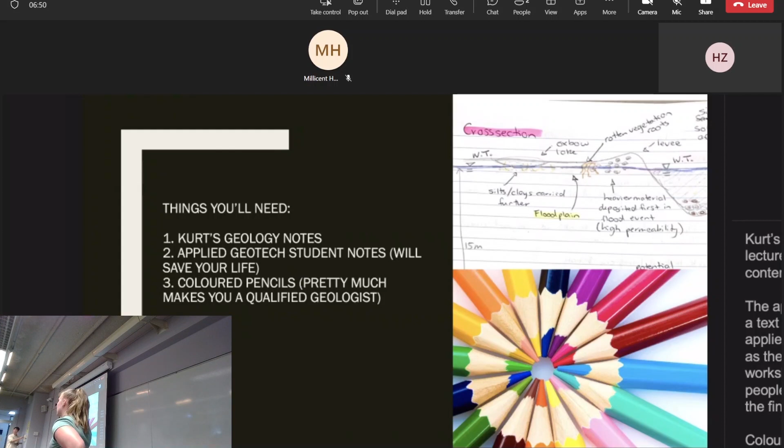So make it easier to see by turning these slides. And then the student notes I was talking about for the second half of the course, it's all in order, it's really easy, it gives you all the equations. They go through it in the workshops. You do the first 3, maybe 4 questions in that book in the workshop, and then the rest you can study. I don't know about you, but I just studied out of that book for the final. I didn't find any other extra things. It was just that.

So for geology, I suggest coloured pencils. Kurt loves coloured pencils. If you ask any geologist, I work in a company which is half engineers, half geologists, they all say half their degree was just colouring in. So try using coloured pencils. I can't say it officially, but I'm pretty sure I got bonus marks just because I used coloured pencils. It was literally brown for the soil and blue for the water, and that's all I used. And he was like, great. So yeah, grab yourself coloured pencils. That's that.

The term outline. Week 1 is plate tectonics, geological time and minerals. Plate tectonics and geological time are good to read through, but it's more just context. It's not actually tested anywhere in the course. It's good to know, it gives you perspective of how things were created, when they were created. It talks a lot about how humanoid life is so recent, and geology goes back to the start of time, pretty much.

Week 2 is the rock cycle and rock formation. It's usually when you do your lab, but I think you can pick your rock lab anytime in week 2 or 3 usually. The rock lab's really easy. You literally just go in and look at a bunch of rocks and they tell you what they are. They ask you questions, but you're not assessed on the questions they ask you. It's just assessed on attendance.

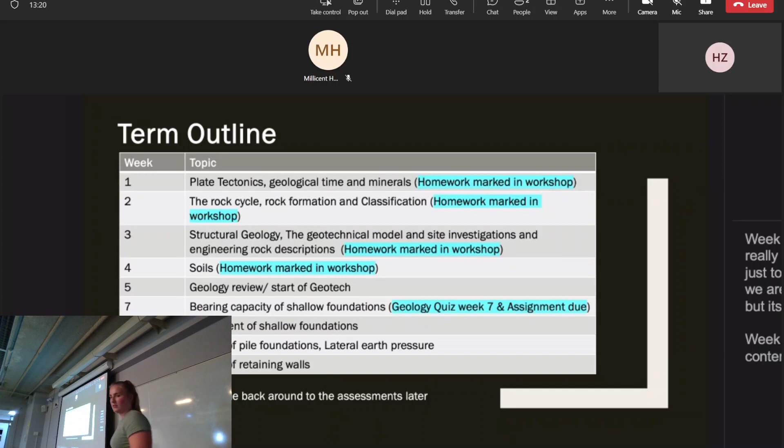Yeah. Well, it used to be actually in one of the classes, but then I think COVID messed that up, and they couldn't fit it back into the timetable for us. So they just said, you have to go with your group whenever you can. But it's really chill. It's really easy. Okay. Are there any other questions before I start content? I'll come back to more about the assessments later.

No? Week 1, geological time, plate tectonics. It's good to read over, but as I said, it's not really assessed again. In terms of geological time, it's broken down into lots of different periods, but they're quite arbitrary depending on where you get your information from, where you are in the world. Different continents divide it differently, and then they go into further divisions again. So for example, Mesozoic, and then that goes into the Jurassic period, the Triassic period, and then one other one that I always forget.

Yeah, that's what I was talking about. You read it once and then you never use it again in the course, so it's not too important.

Plate tectonics, I'm pretty sure we all did this in science in year 10. You have divergent boundaries, which are the ones that are moving apart from one another. If you have two oceanic plates that are moving apart from one another, magma comes in and forms more oceanic plate. So the plates move apart, magma comes up, and there's more plate there. So it's just building plates.

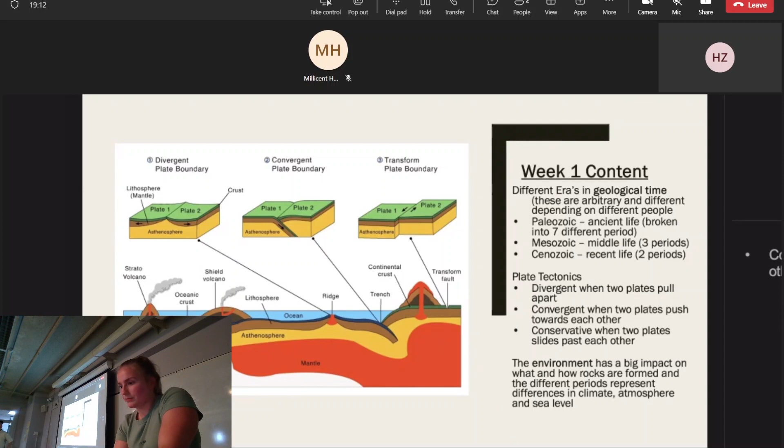And then the last part of week 1 content is giving you an understanding that rocks formed at lots of different points in time, and at those points in time there were lots of differences. For example, different climate, different atmosphere, different water levels, and different pressures. So that has a big impact on the type of rocks and also the features in rocks that you find. Yeah.

Fab. So that's week 1. Are there any questions about week 1? Cool.

Week 2, sorry, I got really lazy with all my photos. I'm not very artistic at all. I'm an engineer in the end.

Week 2, what was week 2? It was minerals, and then it was rock classification and things. It's when you do your rock lab.

Pretty much stratigraphy, I don't know how to say all these words, I always just type them and never say them out loud. It's pretty much just a logic that says the older rock is going to be below the younger rock, because as rock is forming, you have the formation of bedrock, you have more sediment or whatever. Well, I guess this is really in terms of sedimentary rock.

You have more sediment that comes on top. It forms the next layer of rock, you have more sediment. So the top layer of rock is the youngest, and then as you go down, it's the oldest. The only sort of exception to this is domes and basins, which are two different defect types, which I'll go through later. But in general, younger is on top and older is underneath.

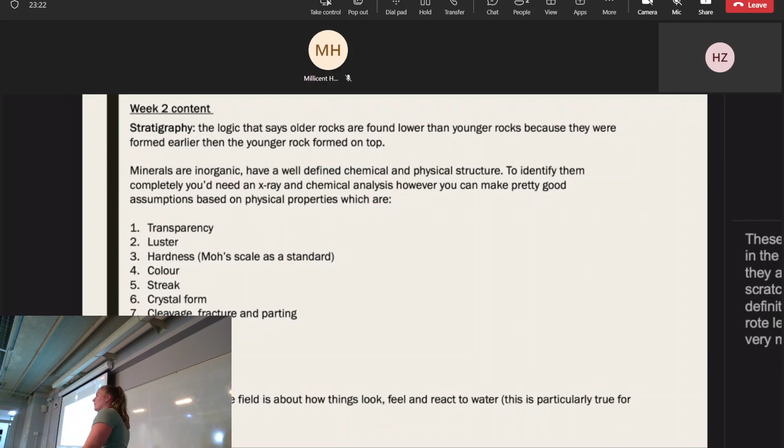I work in this company called PSM. It's a geotech company. We do a lot of field work, tunneling and mining. And pretty much from all the field work I've done, a lot of geology is about how it looks and feels in the field. Feel is really important because you can often feel grain size or things like that. So it's a lot about physical properties. You don't send the rocks that you find in the field back to the lab every time. You just do it by touch on the spot.

Any questions about week 2? No.

Okay. Rock Lab as well is focusing on different types of rocks. There are 3 different types of rocks: igneous, sedimentary, and metamorphic. Igneous rocks are made from the magma, so the mantle layer of the Earth. They change depending on whether they're intrusive or extrusive. Intrusive being they form underground, in confined pressure and heat, they stay underground. A big key factor of intrusive rocks is larger crystals.

The crystals have more time to form because the rocks that are formed underground cool at a much slower rate. As the rock is forming, it's cooling down because it's turning from its liquid state into its solid state. Because it's still underground, it's still close to other magma, so it does it very slowly, and that's why bigger crystals form, for example, in granite.

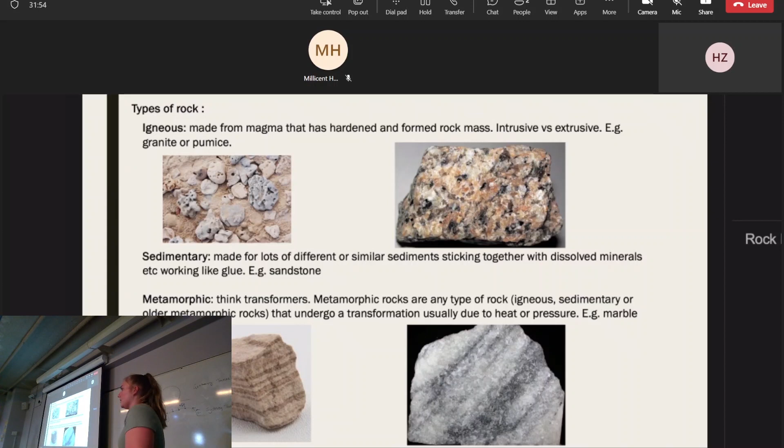And then that's pretty much the rock lab. They just hand you different types of rocks. You look at them, you say that's cool. They'll hand you a microscope to try to look at some of the crystals closer. It's actually quite interesting, but you don't get that much out of it. Do you have any calculations? In geology? No. That's what I mean. It's so subjective because there's no calculations. Yeah.

There is one sort of chart thing that you have to learn how to read, but it's literally 80% of this and 20% of this, so I'm going to draw my line so that 80% of this, the line is on this side, 20% is on this side. It's not calculation at all.

So what are the exam questions like? Are they just word? It's drawing rocks. It's drawing, yeah. So I'll give you an example of the quiz later. I actually had a photo of part of mine earlier. Oh yeah, there. So this was part of my quiz. Looks like a kindergarten drawing. No offense. It's good. It's just part of the course. Yeah, so it's literally just drawing and then labeling things. I'll go through the quiz later, but it's not hard.

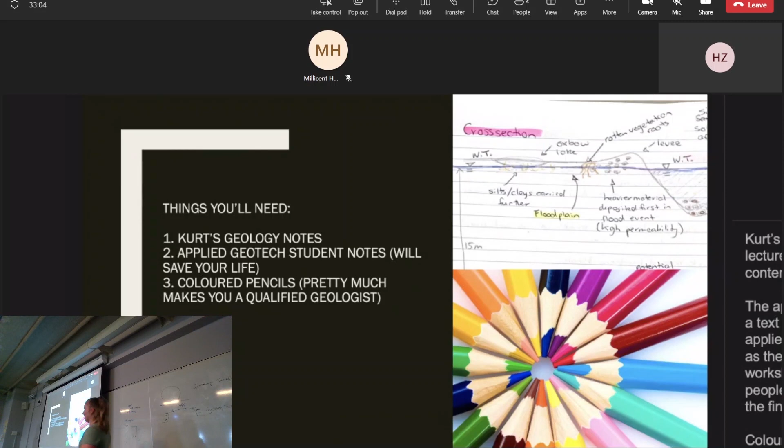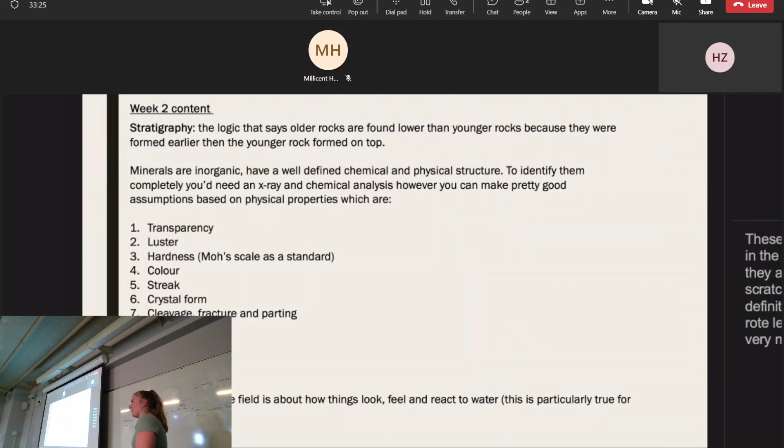Yeah, that is geology to a T. All the geologists at my company pretty much say if the engineers knew how easy geology was, we wouldn't have a job. They could do our job for us in 2 seconds, but we just like to keep them around because they're more fun. They tend to go out more than the engineers.

Okay, were there any questions on week 2 before I move on? No? Fab. Week 3 is structural geology. This week is really important to learn for the quiz. A lot of this stuff is what you can be asked in the quiz. I'll go through the quiz later. I keep going to talk about the quiz, but anyway. The main defects in rocks are bedding planes, which are only sedimentary, unconformities, joints, folds, basins and domes, and faults.

So, bedding planes is pretty much one layer of sedimentary rock occurs, and then there can be however long a time period, and then more sediment is deposited on top and forms its own layer of rock. There is an interface between them, usually a little bit weaker than the rock mass itself because it's not two different types of rock, but the layers can form in different environments depending on how long it was between the sediment being deposited. Oftentimes you get quite planar bedding.

So you'll see when you go to Bronte, which is one of your assignments, in the cliff face there's just practically parallel lines. They can kind of look like this. It's not straight lines the whole way down. They can change up a little bit, but pretty much you'll see that they're parallel to the ground.

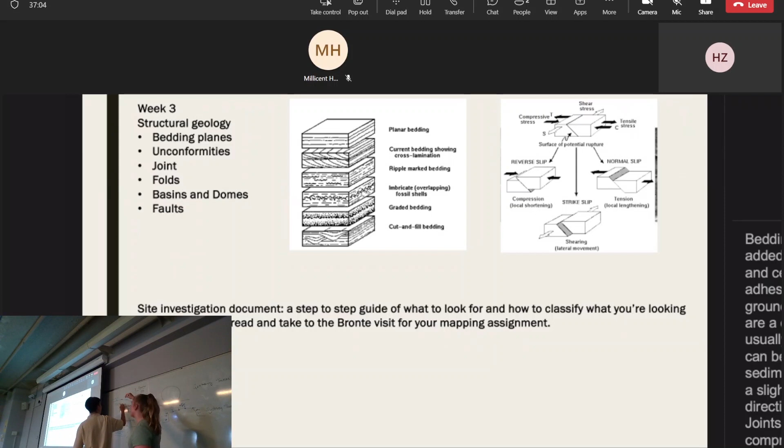As this is being deposited on an angle, the bedding planes will run in line with that. So if you take a cross section this way, it'll look like they're angled, but it's actually just the direction they were deposited in when it was formed. Is that alluvial? That is alluvial / marine. This is soils though, not rock, but that's okay. Alluvial is usually around rivers, so flowing water, whereas marine is the bottom of seas, so it's less stirred up, it moves less, it stays quite where it is.

Like draw the bedding in the quiz? Yeah. So this was limestone. Limestone, yeah. That would be good enough for sandstone, limestone, siltstone, shale, mudstone. As long as you have said that you expect bedding because it's a sedimentary rock, whether you get it in the right angle doesn't matter too much. More just that you've identified that it would be there because it's sedimentary. And there's different layers. Oh!

Wait, you kind of made it on time. Ah, great. Yeah. Come learn about rocks and sand. That's where the magic happens. Is that sand? Sand. That's what soil is.

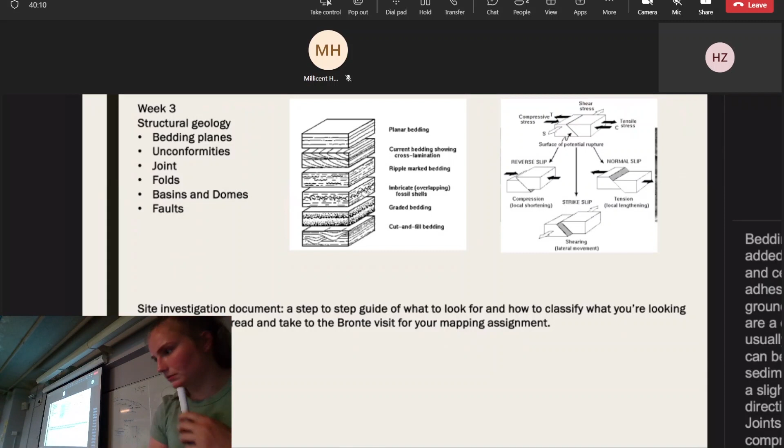So if you have... Should we take a photo of the wall? Sure. Yeah. Okay. Which side do you want? This one?

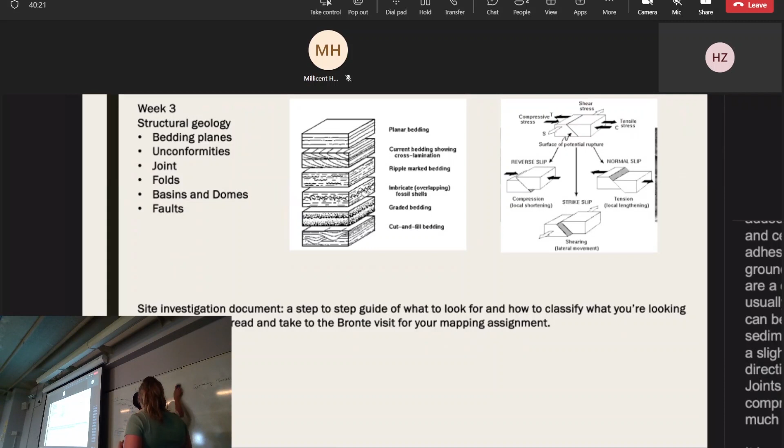So if you think about a piece of rock, like this, and you have compression forces for whatever reason on these two sides, usually it's just confining pressures, because there'll be rock and other things still on this side. It's pushing, it has high horizontal stress. Sometimes what can happen is it ends up almost like a buckle, like this,

with the pressure still forming this way. And then what happens up here is, like a steel beam, you get tension on the top, and then you get these joints forming, which are pretty much cracks because the rock is being pulled apart. And so that's a joint. Another way I can describe it, which is almost an old quiz question.

So you have a big thing of, say, sandstone, bedding is forming this way. For some reason, over time, you have water flowing down this way. It's going to create a very big valley. This valley itself is not a defect, that's just a geological structure.

But because you have high horizontal stress this way in sandstone, and this confining pressure has been moved out, there's nothing confining it anymore, so on the sides of valleys you often have big vertical joints that run down. These open up because there's nothing holding it back from wanting to move in towards the valley.

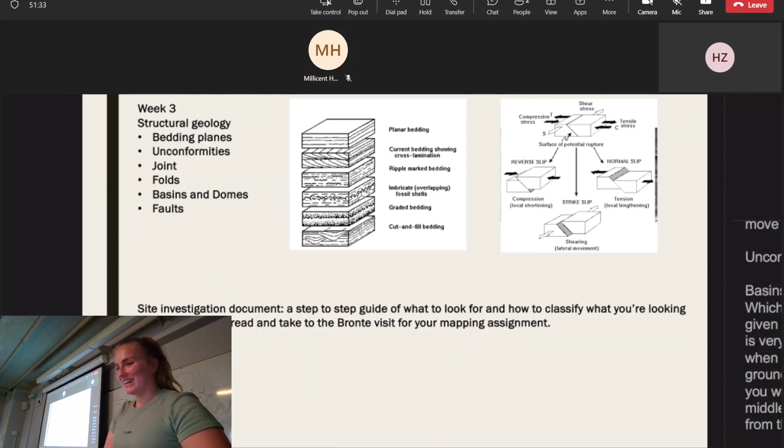Okay, the next one is basins and domes. They go hand in hand, they're just opposites. So a basin is when there has been a subsidence underneath a rock, and it pretty much creates like a pool sort of shape.

It's very often the case with things like longwall mining. Longwall mining happens when miners, instead of creating an open pit, go down below the surface of the earth. They mine one singular seam of coal, and then they just let everything on top settle down instead of trying to move the rest of the geology. So it's pretty much just any movement that allows rock or soil to just sink.

That was basins. Domes, on the other hand, are an uplift of the rock, so it creates a dome kind of shape. Usually it's magma trying to come up, and it's almost like the start of a volcano sometimes, some type of pressure below the Earth's surface pushing rocks up.

Key things to think about: for basins, you'll find the younger rock in the middle of the basin and the older rock as you move out from the basin. Yeah.

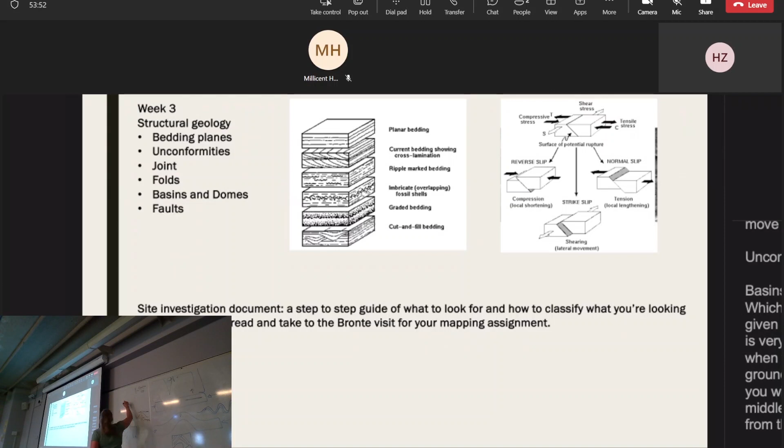Pretty much when a basin forms, it forms like this. There's been some subsidence because of some type of plate tectonic movement usually. Most of these form with plate tectonic movement. You have the younger rock down here because that was the stuff that was originally on top, and because the rock moves as a whole, you can start finding older rock up towards here.

So if you took a cross section across this way, you would have the youngest rock in the middle, and the further away you move from the middle of the basin, you'll see older rock coming up. So domes and basins are almost the two exceptions to the idea of stratigraphy, which is older rocks at the bottom, younger rocks at the top.

For domes, it's the other way around. So the dome, you go up this way, the younger rock is on top and the older rock is on the bottom. But if you take a cross section through here, you'll be at older rock first, and as you move away from the middle of the dome, you'll get to younger rock. Does that make sense? I feel like that wasn't explained well enough.

This was 100 years, this was 200, and this was 5 million. Right? If you take a cross section this way, you'll see that the stuff in the middle is part of this 5 million. This section here is part of the 200-year-old rock, and this section further out again is part of the 100-year-old rock. Does that make sense? Yeah. Like a rainbow and then like a depressed rainbow.

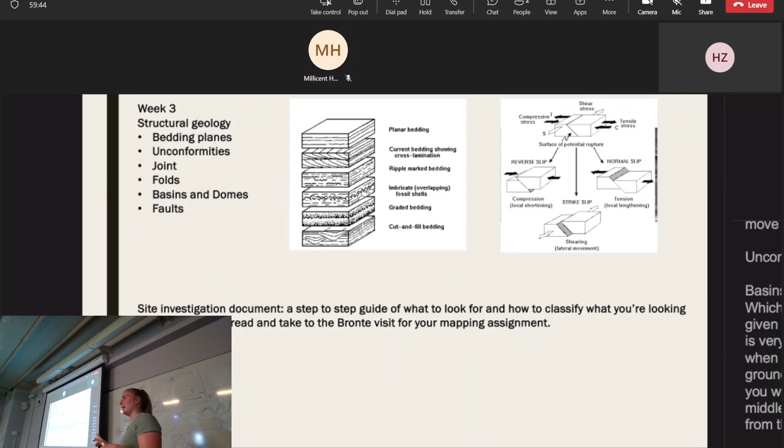practice. Whereas if you go back, it's easier because you've, A, seen it once before, and B, you've had more time to sit with the concept, so you understand easier the second time. It's like rereading something. You always understand easier the next time. You don't take much in the first time.

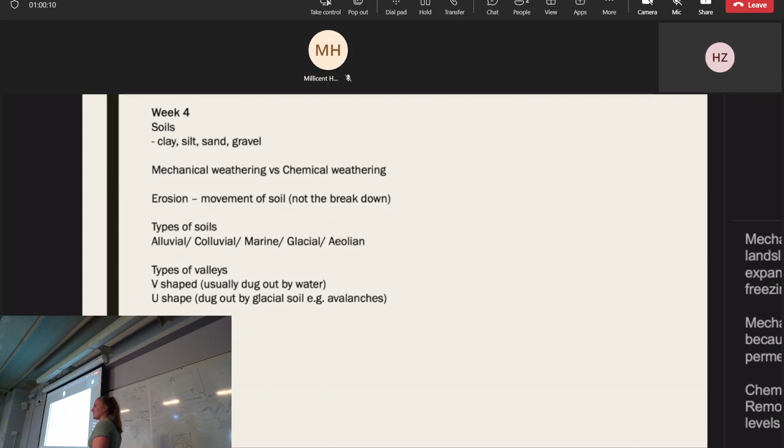Week 4, my slides just start going further and further downhill. Week 4 is all about soils. Soils are great. I love soils. So pretty much, you classify a soil dependent on its primary grain size. You learn quite a bit about this in soil mechanics if you've done it already. You have gravel, sand, silt, clay, clay being the smallest and gravel being the biggest. Gravel usually isn't classified as a grain size just because it's greater than 10 or whatever.

You have mechanical weathering and chemical weathering. Mechanical is the physical processes of weathering. So it's your wind, your water running past the rock, earthquakes, trees growing and the roots breaking up the rock. If you have, for example, this bedding plane, what can occur is something like clay particles come in and populate that defect.

And then clay particles, as you add water, expand. So that pushes out the rock and weathers the rock. Same as water freezing. If there's water in a defect and it freezes, it expands, so it starts to break down the rock mechanically. So mechanical weathering is just physical processes that act on rocks to break them down. Good.

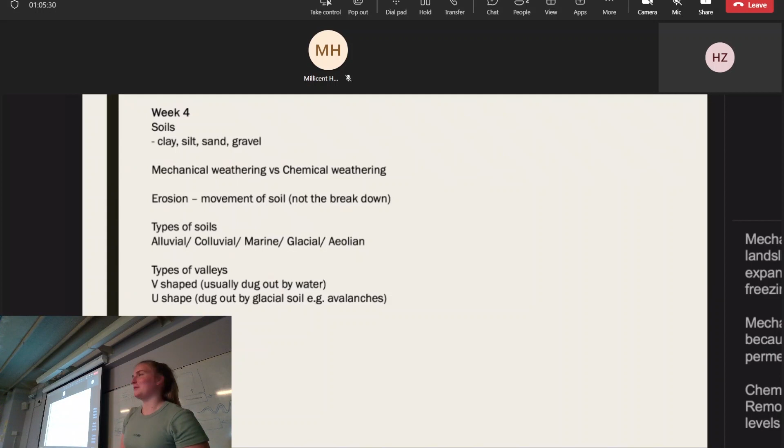Okay, after weathering comes erosion. So they're two completely different processes. Erosion is the movement of soil. So after it has been weathered, usually it's sort of particle size, or it can be boulders and things like that. Erosion means it's getting taken away and moved. So usually it's either wind, rain, water that flows over the top that picks up the small sediments and moves it downstream. It's anything that moves the soil afterwards.

Another side note is residual soil is soil that you find in the place that it's been created. So residual soil is, for example, this rock has been broken down from sandstone and there's now sand sitting on top of the ground. This is residual soil. It can move, I don't want to give a specific distance, but it can move from that site. But if it's in the general environment in which it's created, it's residual.

The other option is fill. Fill is when usually geotech engineers come in, they're like, this is good soil, I want this soil over here because I want to build a building on it. So fill is soil that's in a completely different landscape to which it was formed. Usually it gets taken because of its properties, or it's bad soil or contaminated, so it's been moved to create a foundation for a building where it's going to be buried anyway, so it doesn't matter. Does that make sense? So residual is where it is, fill is where it's moved to.

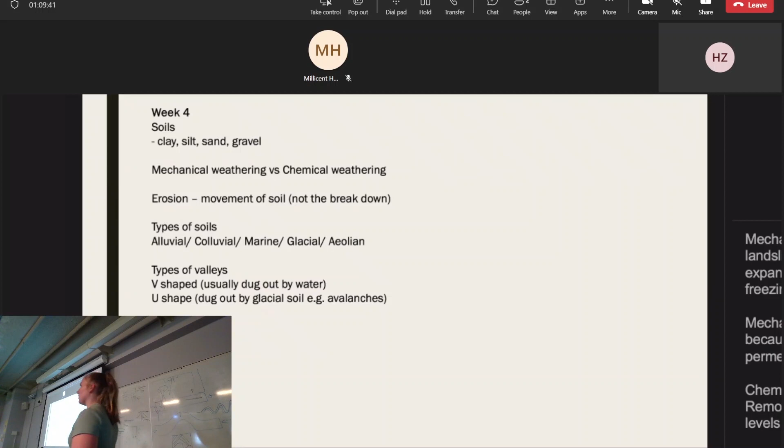Anyway, I'm almost done. I realize I've been going for a very long time. This is the last week of content for geology. You have different types of soils. The different types of soils are just dependent on where they've been created, and you have expected sediments based on where you are. Alluvial is like rivers, so it's a lot of sand and silt. As soil travels, as I said before, by density, it generally drops out.

So for example, this was another thing. Can I rub it out? Oh, I'll take a photo of that. Maybe you can rub out the bottom right there. I think that's all. Yeah, you can do it anyway.

This was another thing that was in a previous quiz. You had a river, and then big floodplains on either side, so quite a flat area. Something a lot of people needed to know to get marks was that in a flood event, as water travels up and out of the river, you get the same type of graded settlement as you do in a normal river downwards. So the bigger gravel and sand particles were here, and as you moved out, you got smaller silt, and clay particles traveled furthest. It's just that logic of where things settle and why.

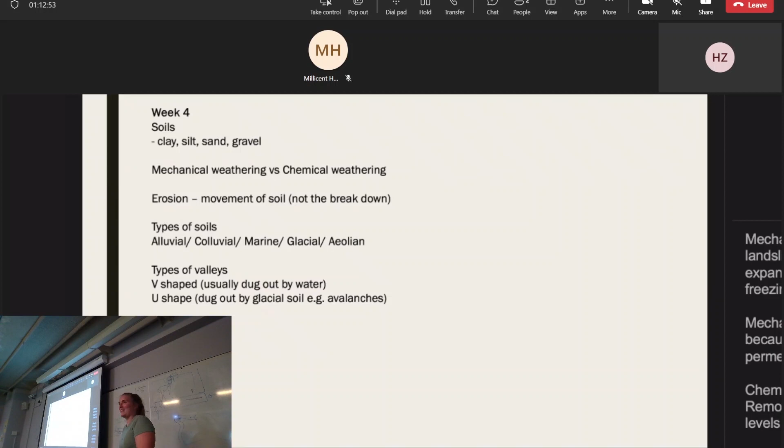Colluvial is just dirt. I don't know how to explain colluvial. It's kind of slightly further out than alluvium, so it's almost the general. I don't know how to explain colluvium. That makes sense. Usually, you'll probably get clay particles in colluvial.

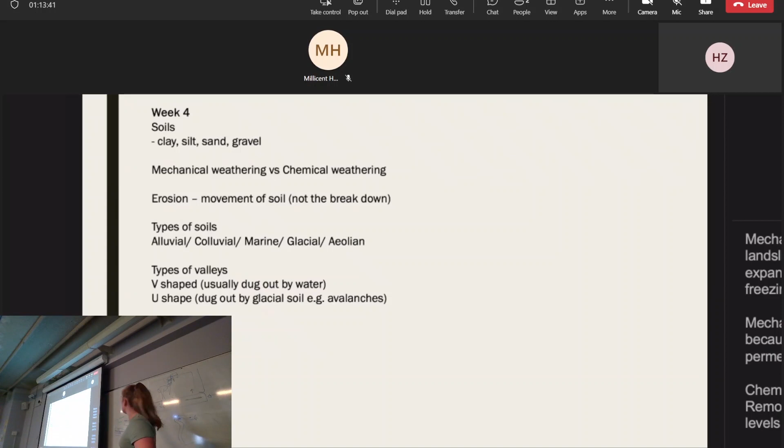And then the last thing I'm going to talk about are the different types of valleys, which often occur in the quiz. You have your V-shaped valleys, which is what I was talking about before. The V-shaped are dug out by water. So if you have a stream or a waterfall coming off the top of a mountain or cliff edge, the longer that waterfall is coming, it has the potential to bring pieces of weathered rock with it.

So imagine, I'm gonna rub this one out. If you have a cliff face and you have a waterfall coming down this way, it has the potential to start taking off pieces this way until it works its way back, and then you end up with almost like a stream down this way. This valley, because either side into and out of the whiteboard you still have the rock where the water wasn't flowing, is going to be a very sharp kind of V shape. So that's when it's carved by water.

I probably misled you here because if it's a glacier, it will be U-shaped because it brings down boulders and the boulders take anything in their path with them. So if you imagine a 2 meter wide boulder coming down from a glacier melting or something, it's going to carve out a very U-shaped valley.

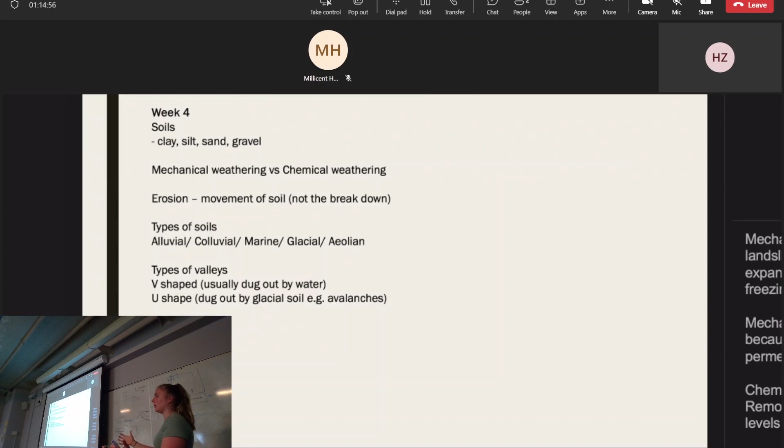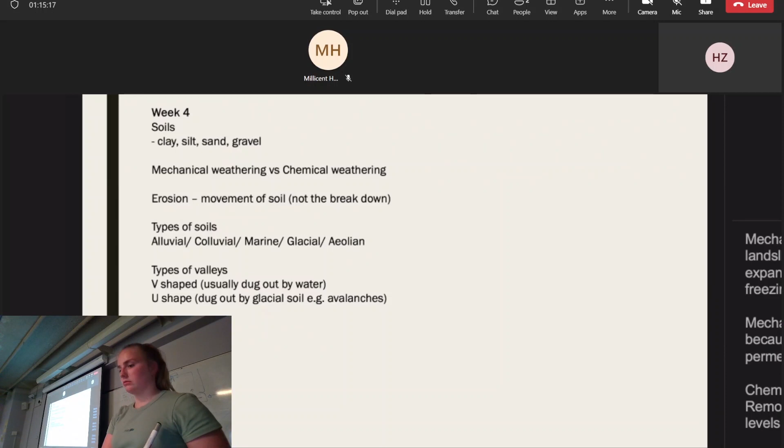You'll also in glaciers have striations on the rock, which are pretty much just scratch marks on the rock, and it can often be quite slickened, so it can be quite smooth after a glacier has gone down. Any questions? Fab. The last thing I'm going to talk about, sorry for talking so long, are the assessments.

So, your first one is homework and the rock lab. It's only worth 5%, but it's the 5% that's worth getting because it's very easy. Homework, they just release a set of questions. It's usually 4 or 5 questions. Usually you can answer most of them just by Googling it. Pretty much as long as you attempt it and show that you've done all of the questions, when you get to class, you'll get the marks for it.

Another part of that homework, kind of unofficially, is you have to finish the exercises you do in class. So in order to leave the tute with marks, you have to do any exercise they tell you to do during the class. Rock lab, just show up. It's an hour or half an hour or something. You look at rocks, you nod your head, and then you're like, cool, done.

The quiz, it's drawing. It's all about drawing. It's where you need to use your coloured pencils. Please use your coloured pencils. I can't say for sure, but I'm pretty sure I got bonus marks because I used coloured pencils. My breakdown for the quiz was use small sketches.

So for example, if you have your big U-shaped valley like this that you've drawn out, go in and draw a smaller view of what just down here would look like. So you could have a stream down the middle or something like that, which is the side of that U-shaped valley. Go in and draw perspective drawings as well. The more small drawings you have, the more likely you are to have explained every part of that geological setting. This is for the quiz? For the quiz, yeah.

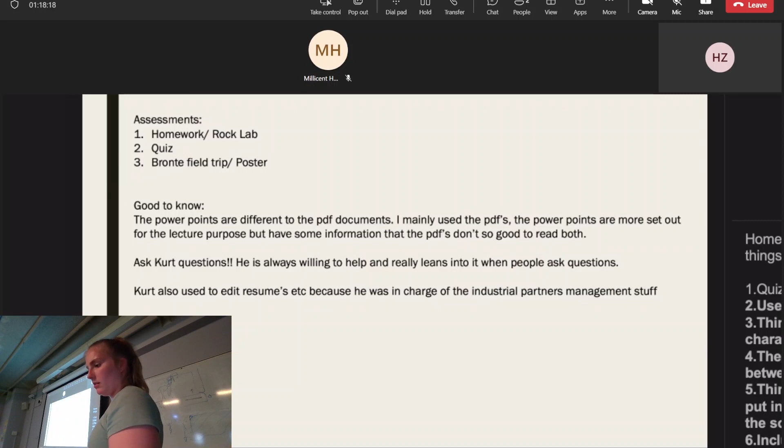Thinking about the types of defects that you would find in the rock and why you would find those defects in the rock. So for example, you might find granite where a convergent oceanic plate meets a continental plate, because there's a big area in here which can have magma that cools slowly. I don't know where I was going with that. Defects. I lost my train of thought on that. Anyway, think about what defects the type of rock would have.

Can I change screen really quickly?

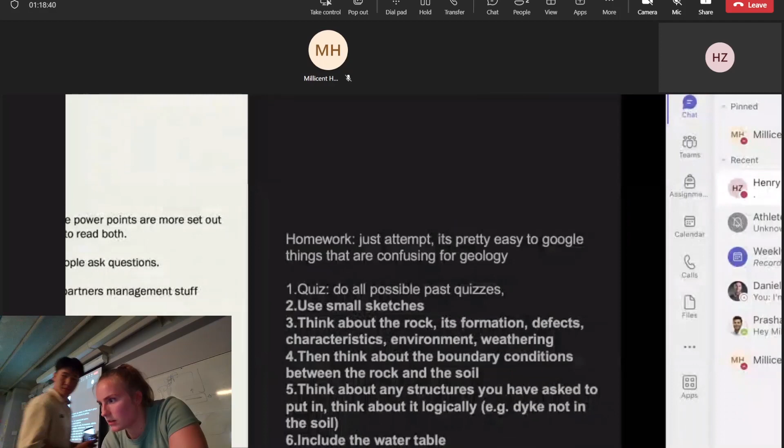Would that follow my change? Yeah, just change it. I'll zoom out on this. Where is it? Geology quiz. That's it. Okay, I'll just see a picture.

So pretty much all of these are past papers of the quizzes. They should all be released to you with solutions and how Kurt marked it. I went through and started just looking at rocks. You can pretty much get given any type of rock. From past quizzes you could kind of see trends in what rocks they were giving you, but in reality you can actually be handed any rock. So you need to do a little bit of research on different types of rocks, how they're formed, typical defects that form in them, all that type of stuff.

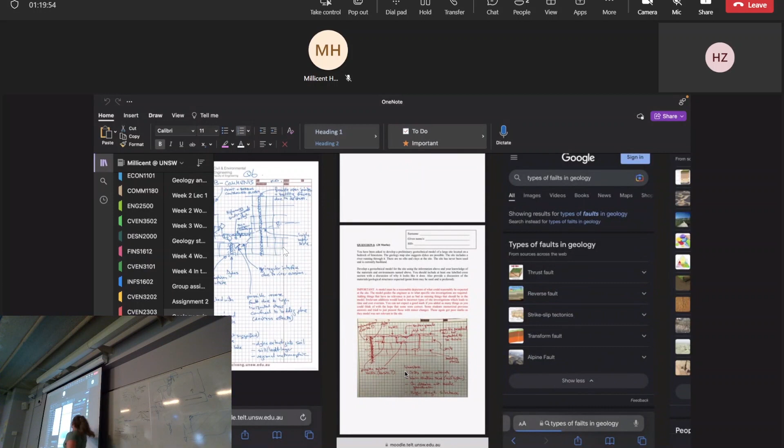Closed book, right? Theirs is closed book, yeah. But yeah, for example, this one. He's highlighted all the important things in red that he would have pointed out in this quiz. So he actually does really well in terms of prepping you for the quiz. It hasn't changed that I could see in the last about 5 years, so you can feel pretty confident going in that it's going to be a similar type of quiz.

Where is it? Can we zoom? Oh, yeah, you zoom. Yeah, I'll do it.

And then you also need to think about the boundary conditions between the rock and the soil that's there. So like, will it be very weathered? Will it not be very weathered? Will it be rough? Will it be smooth? Things like that. And then you also need to think about structures that you've been asked to put in. Usually you get asked to put in a dike or something like that. Sometimes it doesn't really make sense.

For example, I got given a dike, but I also got given an alluvial floodplain setting. Usually those two don't go hand in hand, but you just have to go with it. So I put my dike up the middle and said the areas on the outside would have metamorphosed. And then there's the grey area that I was talking about before, and then there's the bedding planes of the sandstone. So you just in the moment have to think what would happen with those features.

And also do not forget to put your water table in. The water table line is very important. He gives out like 5 marks just for that water table line, so always think about where it is. If you have a valley like this and a river down the bottom, that's not a very good example. If you have your river coming down this way, I got given a river and floodplains on either side. These are my floodplains. I also got given a flood event. So you have sort of banks that happen there as the sediments build up here, bigger sediments, because they get dropped first in a flood.

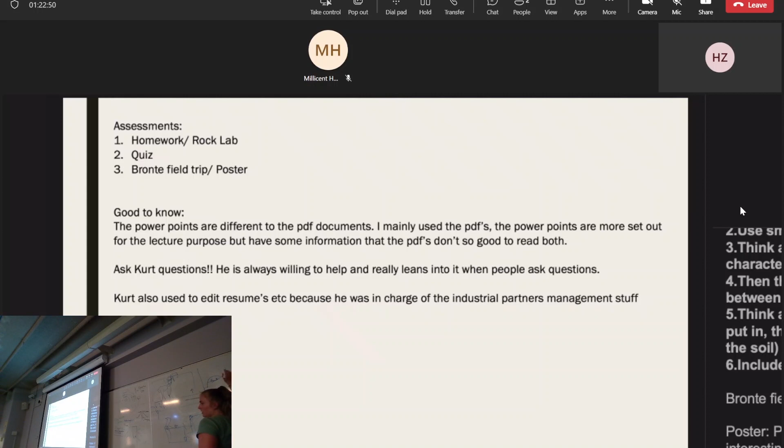And then the Bronte field trip, make sure you take that printout, and make sure you pick your group wisely. It's the same group for your Bronte field trip and your poster. For the poster, usually you pick a geological setting that's quite interesting and then make a poster about it, like how it was formed, things like that.

I think my group went slightly wrong. We picked the Leaning Tower of Pisa because we were like, that must be cool, the tower's gone all funky because of differential settlement. Turns out it was just all marine and alluvial sand that had settled, and it was really uninteresting geology. So pick an area of geological interest. Usually where two different lithologies meet is quite interesting, like where you have a dike and sandstone, because they're quite different.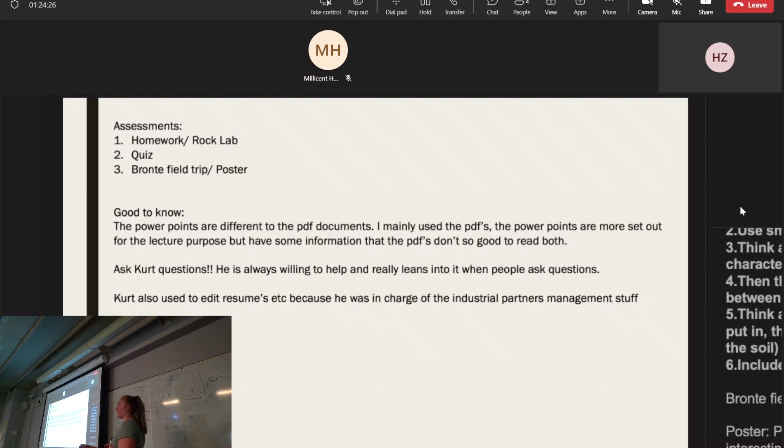They don't like it when you pick like the Grand Canyon. If it's the first thing that comes to your mind, it's a bad choice. Brainstorm like 25 places and cross off the first 20. You only have to do one, so pick one.

Good things to know: the PowerPoints are different from the PDFs in terms of course notes. The PowerPoints are more set up to present like lectures, but they do have some interesting facts that aren't in the PDFs. The PDFs are like the bare bones of it. So if you want to read more, go in and read both.

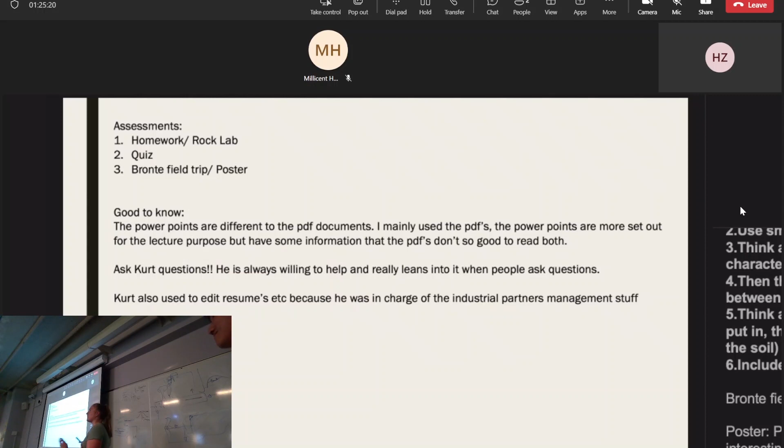Ask Kurt questions. I found him really nice. He was really responsive. He's quite blunt in the way he says things, but he's really responsive, and he really appreciates people showing an interest in what he's teaching. Yeah, so he really leans into it when people ask questions.

He also, I think, still is the industrial partners manager person. So, for example, when we had the careers fair last year, he was walking around there. He also often offers to edit resumes, cover letters, anything to help you get industrial placement. I don't know if you guys might be working already, but he's a really good person in terms of that. He completely edited both my resume and cover letter, and said he was also a reference for my job, even though I had it before. But yeah, that's it for geology.

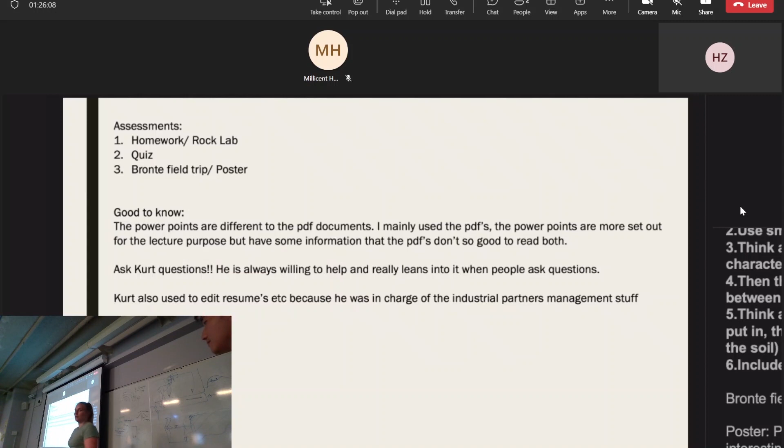Okay, so the first thing to note is that you've probably heard about this printout before. In week 7, maybe on Monday, maybe later in the week, they hand out these printouts, and you want to grab a copy because it's a limited amount. They're nicely printed in color with binding and stuff, but there are online copies as well. It's basically the Geotech Bible. For the second half of the course, everything you need to know is in that book, and it's really well presented as well.

Pretty much in my company, maybe 60% of the people who work there went to UNSW. Everyone still has this on their desk to use. It's really good.

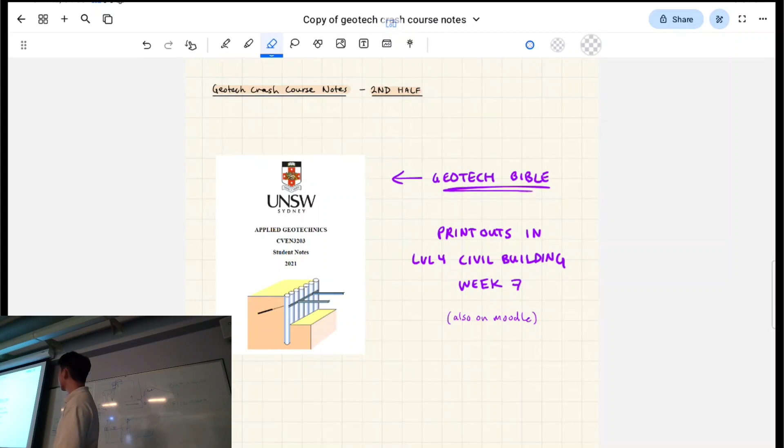Okay, so just keep this in mind. Really, really useful. I know Millie talked about this, but we're going to quickly brush up again on it. When I say research skills, it's because part A of your assignment is looking at a place you're not physically going to go to. Like for me, I'm not going to go to Iceland to do my assignment, and Millie's not going to go to Italy. So that's all about research and finding good resources on Google Scholar or whatever. Practical skills is doing your site visits, as well as the workshops in the first 5 weeks, which are all hands-on, like thinking in 3D, role-playing that you're a geotech engineer.

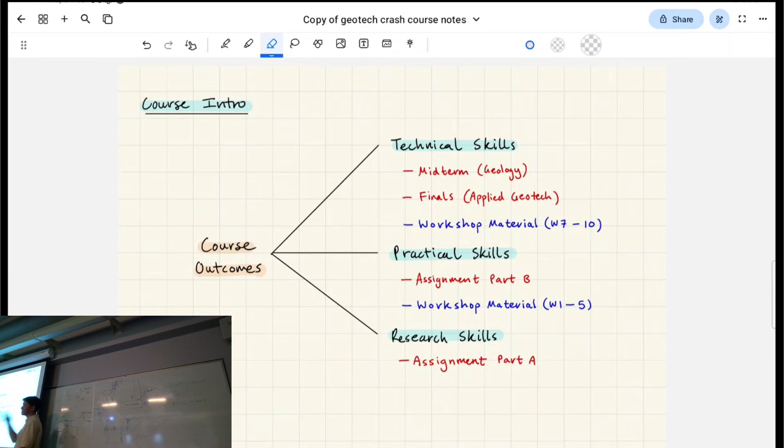In terms of technical stuff, that's for the midterms, so what Millie was talking about. That's all geology, right? This course is going to do a complete 180 and become soil mechanics part 2 in the second half. So that's applied geotech, which will be the finals material.

Here I've broken up the week's content. The first 5 weeks is what Millie was talking about, so those words should seem relatively familiar. That's how the course is laid out. In the applied geotech part, we have the overview of this part of the course and a soil mechanics review. That starts out pretty chill. Actually, that could be week 5, right? Yeah, it's actually week 5. And then it starts talking about these words here. I'll highlight them.

It starts talking about foundations, retaining walls, things like this. So these are earth structures. That's kind of the crux of this half of the course, essentially, right?

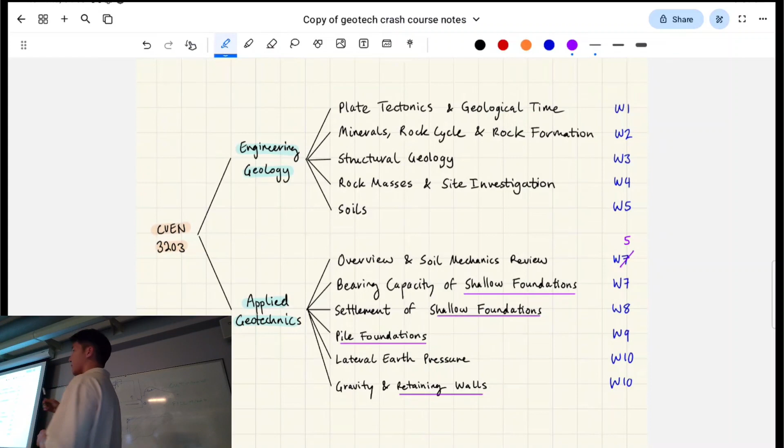But earth structures, think about this, right? What would they be made out of? Like these things, shallow foundations, piles, retaining walls. Anyone? Soil. What do you say? Soil. So they're built on soil and they're built on rock, but more specifically, right? Because you've done concrete, right? Concrete with steel? Yeah, it's reinforced concrete structures essentially. That's what all of these are made out of. And so this is a really interesting intersection between reinforced concrete and soil mechanics and geotech.

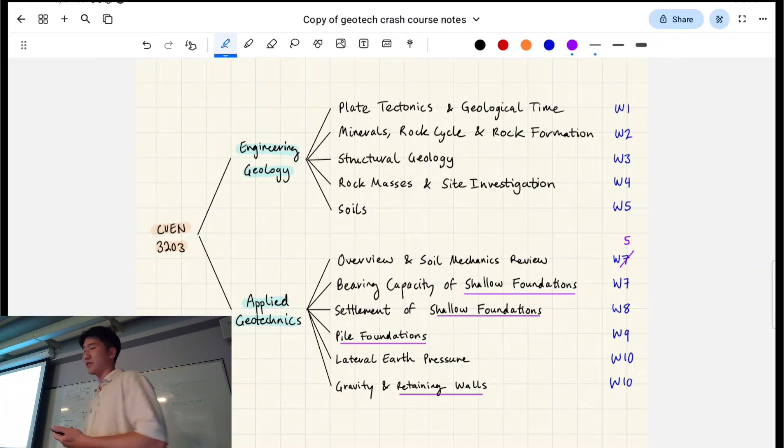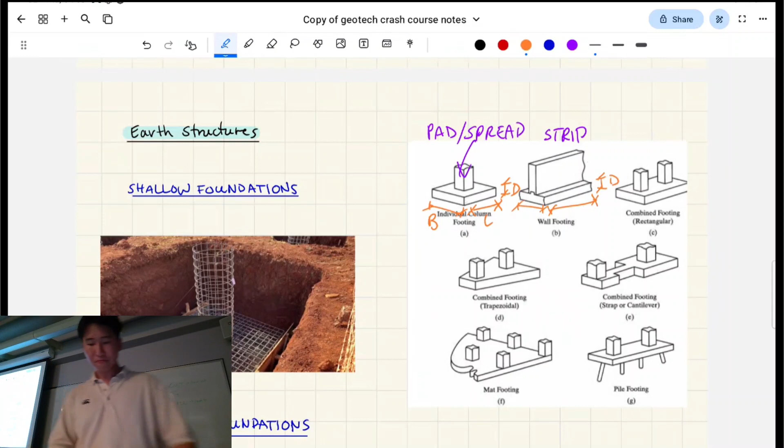But for a wall, essentially we do our calculations per meter of this length, because this L is extremely long. It doesn't matter how long it is, it's a strip. When you see a strip footing, which you'll see in the question I'm about to do, the L dimension effectively doesn't exist, or it does, but it's so long that we don't consider it. We do the calculations per meter, like 96 kilonewtons per meter. Any questions about that?

I'll quickly touch on these ones, but I'll get to the calcs first. So piles or deep foundations. When would you need this, as opposed to a shallow foundation? Shara, do you want to have a crack at this? If you're building underground?

Maybe. But say you're building a big building, right? For example, this is all weak soil here, and this is strong soil, rock. You kind of want to embed your building into the strong foundation so it doesn't move, especially if it's a really big, heavy building like a skyscraper. That's when you need a deep or pile foundation.

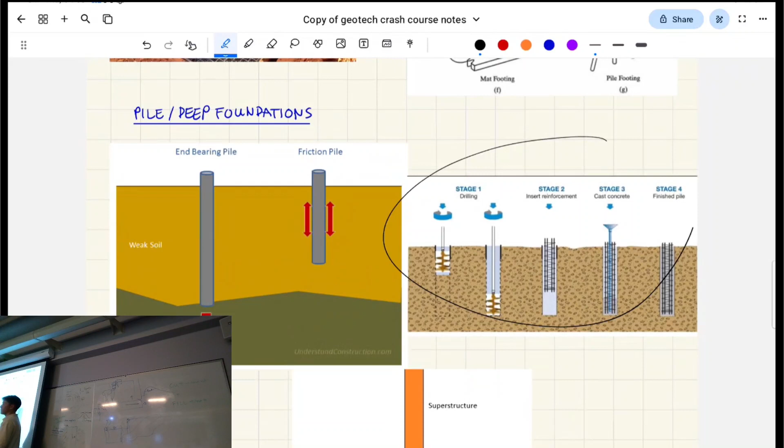Here I've included, from my 2101 assignment back in second year construction, one of the construction equipment I analyzed, which was a piling rig. They have the big drill thing, and it drills into the earth. You insert a steel cage into it, and then you cast concrete. Very similar to any other reinforced concrete structure, but usually they're cylindrical. That's what a pile is pretty much, but it's for the sake of being a foundation for a building or whatever.

Okay, all good? We're gonna fly through this, guys. One more thing is, that's a pile cap. These were the piles I talked about here. This concrete structure which you cast is reinforced, and it's just to combine the piles so that they are one structural element, and then you have a building which is structured, right?

So what is... So this might be like a rectangular concrete wall, and it's just to stitch together these concrete elements into one structure. Is this a deep foundation? Yeah. So these piles are the deep foundations, and then this is the pile cap on top, right?

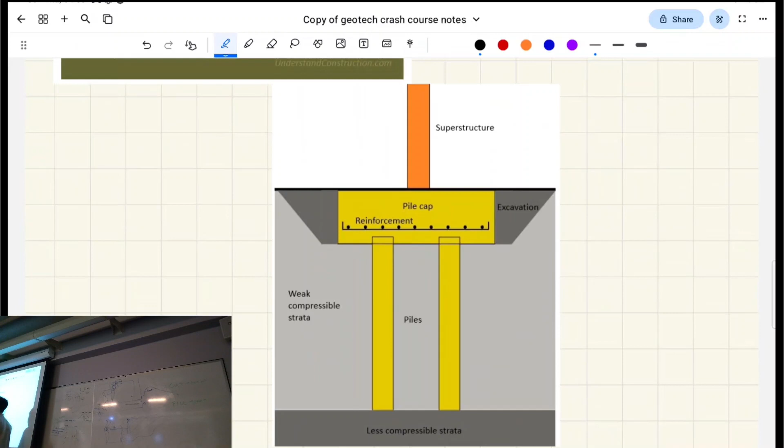What have we got here? Retaining walls. The important thing is there's two words you hear a lot: the toe and the heel. We talked about fill in Millie's part. Have you seen those retaining walls when you're driving through the highway in rural New South Wales, and they have to cut through a mountain, and they build retaining walls so the earth doesn't collapse in on itself?

So the backfill is the higher end, where they've put in a bit of earthwork to fill it up. The heel is the side of this retaining wall close to the backfill, and the toe is the other side. There's a few types of retaining wall designs. I'm pretty sure this is a cantilever, sometimes called a toe and heel retaining wall, which is probably what you'll deal with in the retaining wall portion towards the end of the course.

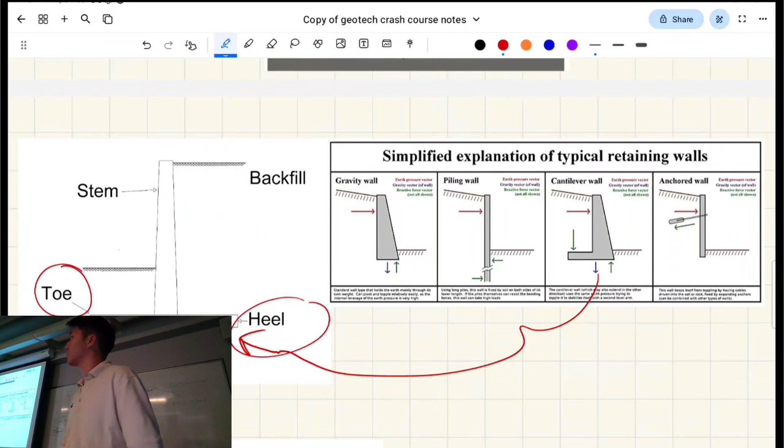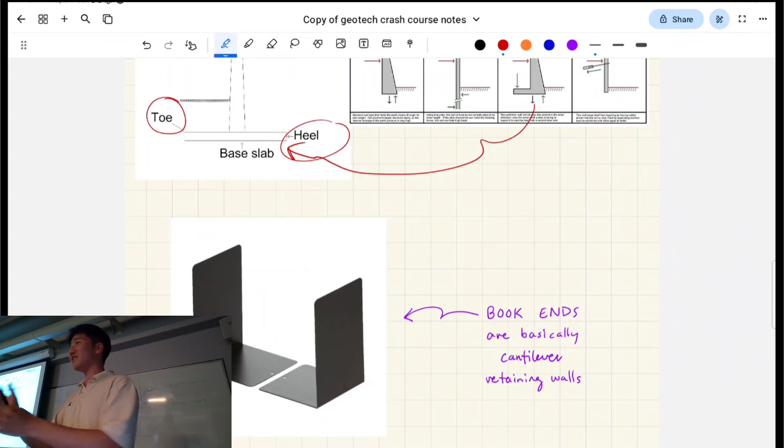Shara, do you have bookends in your home library? Yeah. This is basically a cantilever retaining wall, if you think about what the books are doing. You want to keep them together, because you don't want your books to fall over, so you put the bookends in. The book's weight is stopping them from going sideways in this bookend design. You're doing the same thing with the soil, pretty much.

So which end is which? It's kind of like this. It's a cantilever wall, but there's no toe in this bookend. This is the heel side, towards the back, because the weight of the back heel is going to squash down and stop this from wanting to overturn. So it's because you're squishing down on the floor underneath the backboard.

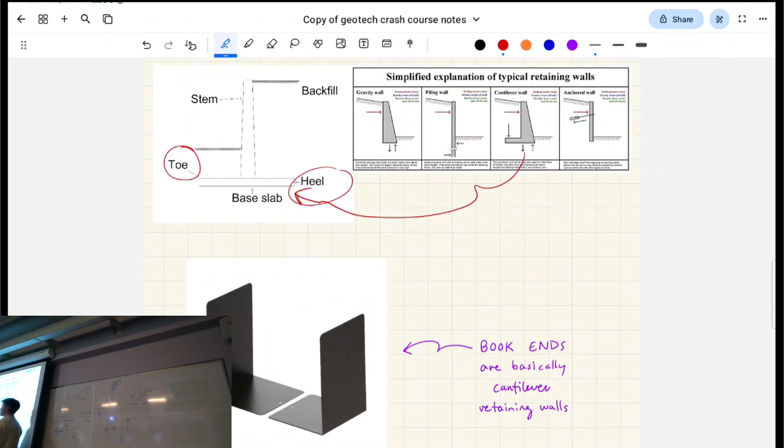Yeah. Oh no, sorry. This is one concrete structure, right? And the weight of the soil is going to keep this part from wanting to rotate like that. It's called an overturning moment. You see it in the next bit right here. These are the ways that a cantilever, or toe and heel retaining wall, can fail. Since I'm limited on time, I will quickly write this down.

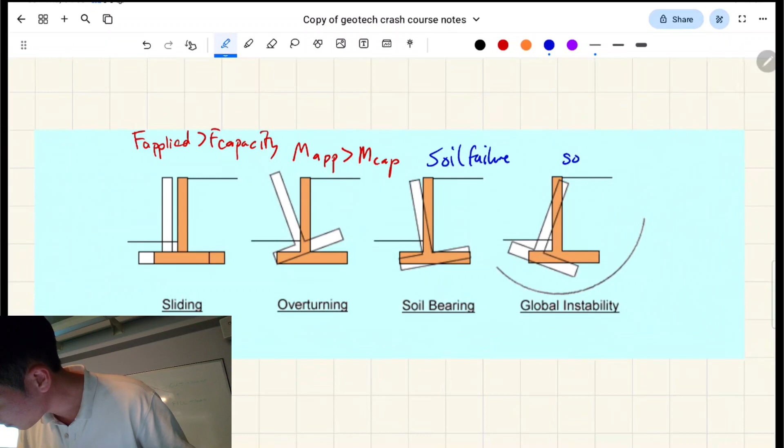I'll be honest, this is kind of pseudo because I didn't have this much time to cook up the course. But this is kind of a combination of what I remember from advanced concrete, when you're designing a retaining wall. Okay, sorry, don't quote me on this.

Basically, with these earth structures, the two main ways it can fail is... actually, now that I look at it, the only way it's described here that it can fail is due to the soil, right? These are all excess force from the lateral earth pressure of the soil here. Here it's overturning and bearing at this point. And then you have, actually, you know what? I'm just gonna stop talking. I don't know enough about this topic, sorry.

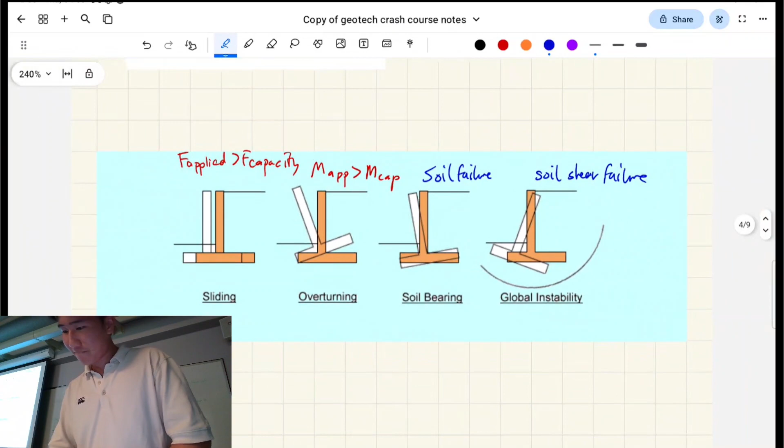In advanced concrete, what we learned is that the concrete itself can fail. The concrete itself can break. And so you have to check both the concrete strength as well as the soil and the methods the soil can fail in. But I think in this course it's just the ways that the soil can fail in. So sorry, don't quote me on that one. Okay. Oh, sorry, did you need to copy that now?

Okay, so geotechnical design criteria. So we've finally gotten into where the book picks up, right? This is the first part of the notes, essentially. And Sue, because I know that we did concrete together, what were the design criteria for concrete back when we did it? There's two main ones. The words are here. Serviceability, that's one. Strength. That's right.

So the strength criteria is based on, at a certain point, it's not strong enough to withstand a large load or whatever. But anyway, the serviceability criteria is to do with everyday loading, so slow deformations and stuff over time. And it's kind of governed by soil settlement. If you remember this graph, you have your stress strain. This is essentially stress strain, but a bit modified.

The settlement is basically to do with your sort of strain. What do they call this? Delta E, right? Instead of stress, we're talking about forces or moments, in the case of the overturning moment. And then here we're talking about it in terms of deformation, how much it moves, pretty much. And so these are the two limits that we're designing for.

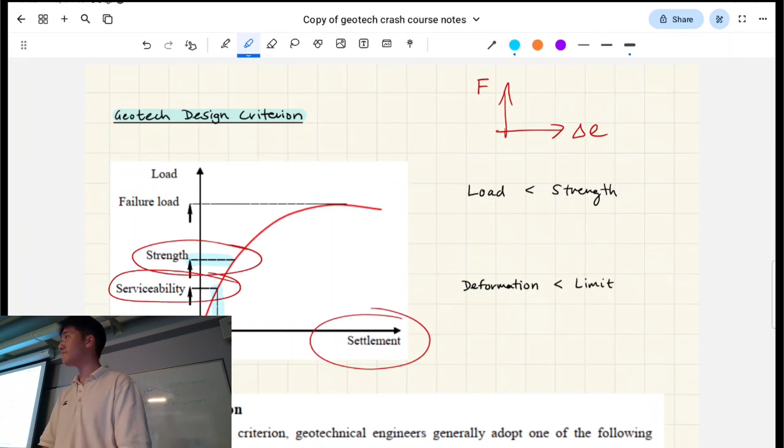And with how the course was broken up, if I go up here, you'll see that you have bearing capacity of shallow foundations and settlement. So bearing capacity is which one, David, of the two things I talked about? Sorry, between bearing capacity of shallow foundations and settlement of shallow foundations, which one might be the strength design criteria, and which one might be the serviceability design criteria? Sorry, it's a bit confusing.

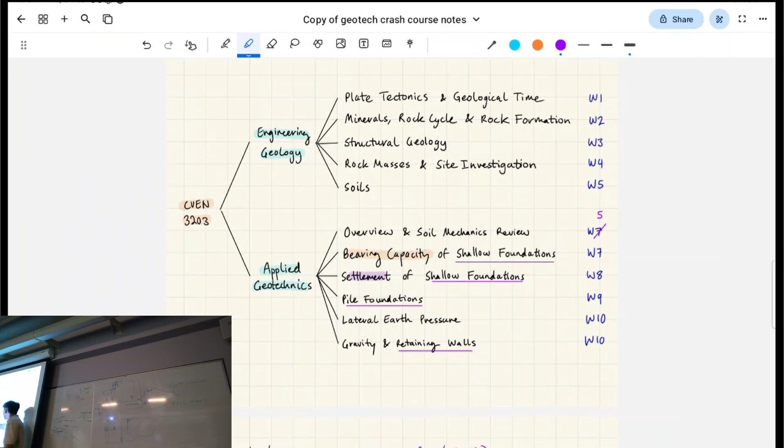So bearing capacity is how strong it is, pretty much, the strength of the shallow foundations. Whereas the settlement is the serviceability design criteria, because it's about how much the earth moves. So that's how the course is working. Pile foundations, we'll talk about both in that one topic. I think the majority of it is bearing capacity. Bearing capacity is just another way of saying the strength design of the foundation. Yes, I had to think about that for a sec.

But you're imagining not the foundation fails, it's the soil around it fails. Yeah, that's true actually. In geotech, it's not our problem if the structure itself fails, it's our problem if the soil fails. So again, advanced concrete, a structural course, that's calculating your reinforced concrete breaking. You just assume that doesn't happen here.

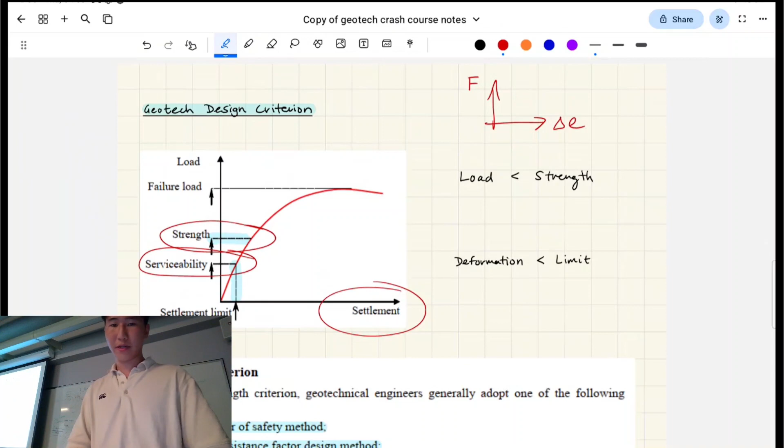Okay, there's factor of safety stuff, which you learned a little bit about in soils. I'll just draw it out here. These formulas make more sense when you do the questions. There's basically a few methods. This one's the factor of safety method. This one is, if you've done steels, what they use in steels, although you usually don't see it in this super theoretical way.

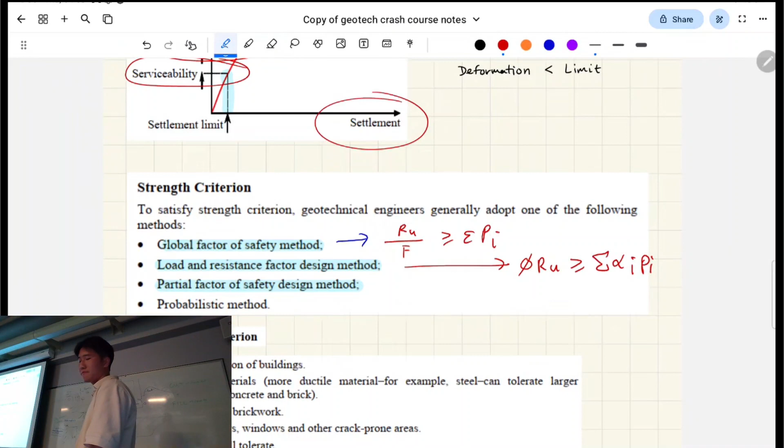This is a few different ways that they outline on how to calculate capacity versus loading. So to recall an example that Will gave for the steels crash course, if you were to design, for example, scaffolding for a construction site, and you wanted to design for 300 kilograms, say that's like 3 really heavy lads that all weigh 100 kilos. Would you design it so that it can resist exactly 300 kilos? No, right? Because you want to design it so that it can withstand a bit more, so that there's a bit of safety involved, right?

So that's the whole idea with structures. Just to talk about structures, this is what they use in structures. That component there is your reduction factor, and that reduces your capacity so that you underestimate it a little bit, you know? Anyway. And then this one is to exaggerate your loading. So instead of three 100 kilo lads, we pretend that they're three 150 kilo lads, but my section for the scaffolding should be able to withstand way more than that. You have these things in place.

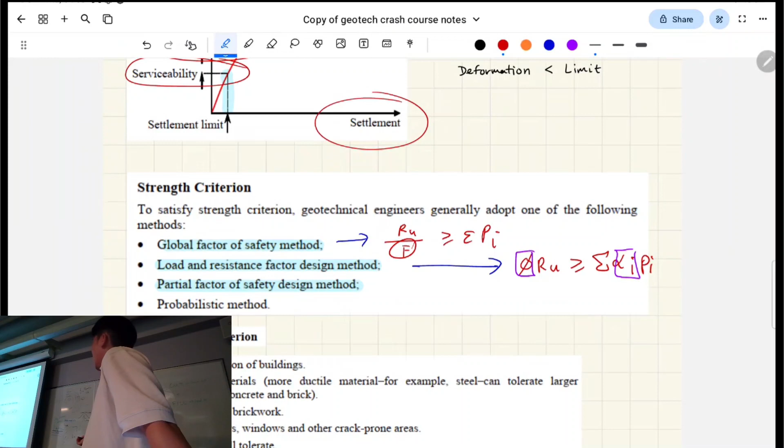But the good news is for factor of safety, there's only one part of that in this equation, and they just give you one number. So it'll be like designed to a factor of safety of 2, or a factor of safety of 3, whatever. That's the number that you reduce your soil strength by, the soil strength around your structure, right? And Millie said earlier that this is something they just give you in the questions, because in real life, your client will just say, we want to design to a factor of safety of 2 or 3. So it's just what the question tells you, because that's how it works in real life pretty much.

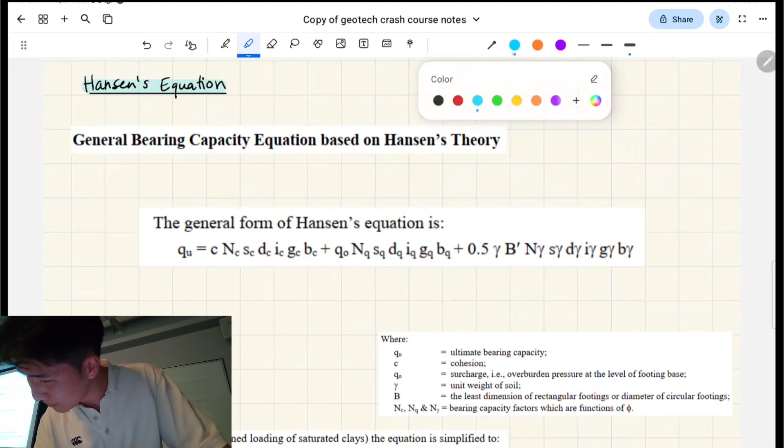I'm not going to talk about this. Okay. This is the most messed up looking formula of all time. But we'll break it down because it's actually not that bad. Because most of the time, especially in the general case, you don't have to calculate most of these things, right? And they're from this table, which I'll show you below. Oh my god, sorry. So if you notice some patterns here, I'm going to just go through the colors.

So basically, do you see how it's just the same thing but with different subscripts? So you have 3 components here. This C denotes soil cohesion, okay? And then this Q is to do with the surcharge component. So the surcharge component, soil cohesion component. And this one is to do with the unit weight of the soil. And this B, like we talked about, is the least dimension of your foundation. So this whole thing is calculating the bearing capacity of our shallow foundation, for your pad footing design, your strip footing design, these kinds of things.

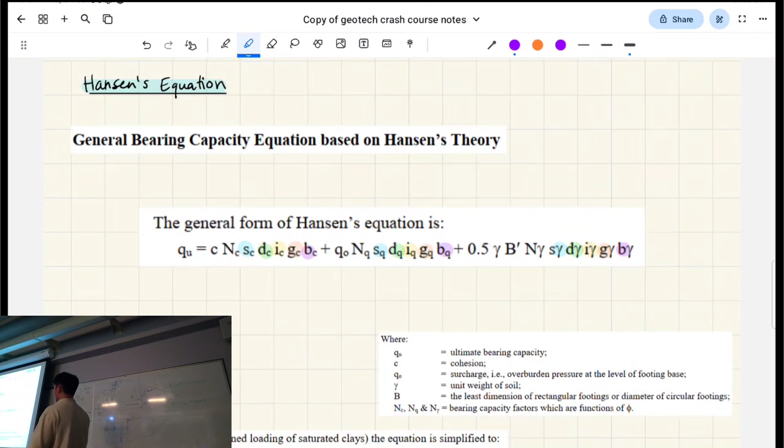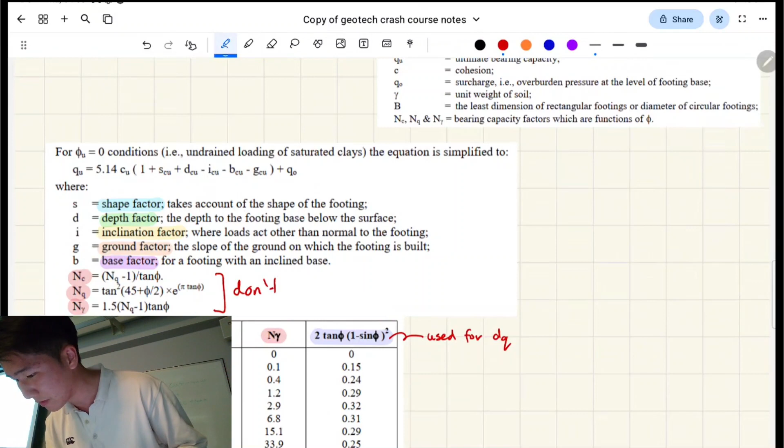And you'll notice as well that each of these components has an N. N just stands for a factor that you find from either an equation or the table. I'll explain these later, but N has these equations, right? But the good news is you don't have to calculate these unless they give you a weird angle, because this table gives you the common values. These are all your potential angles, and you just go across and find what all these numbers would be. It's not bad, right? This part of the table here is used to specifically calculate one of the factors, dq, which you'll see below.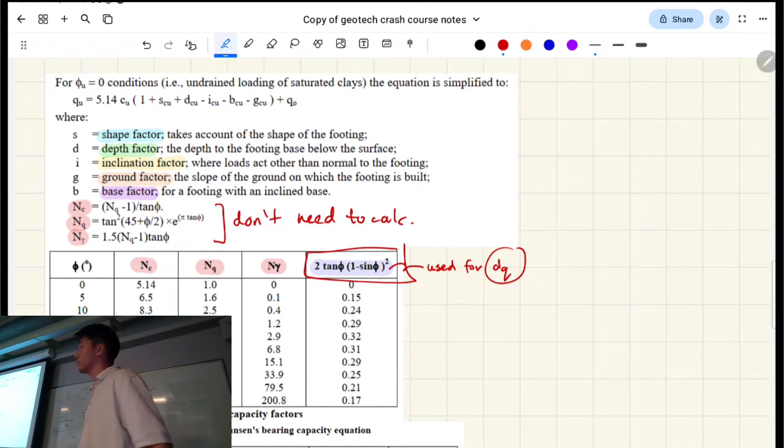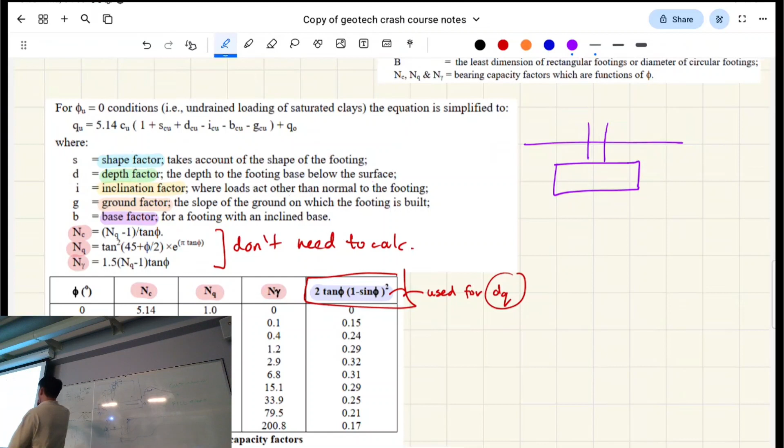But yeah, let's quickly talk about what all of these things mean. Your shape factor takes into account the shape of the footing. So whether it's a circle, a rectangle, or whatever, there's a number associated with it, which will increase or decrease your strength pretty much in this design. The depth is to do with how deep, so looking at an elevation view, how deep your foundation is into the earth. It'll increase in strength because it's being squashed by the soil, so it takes on more strength pretty much.

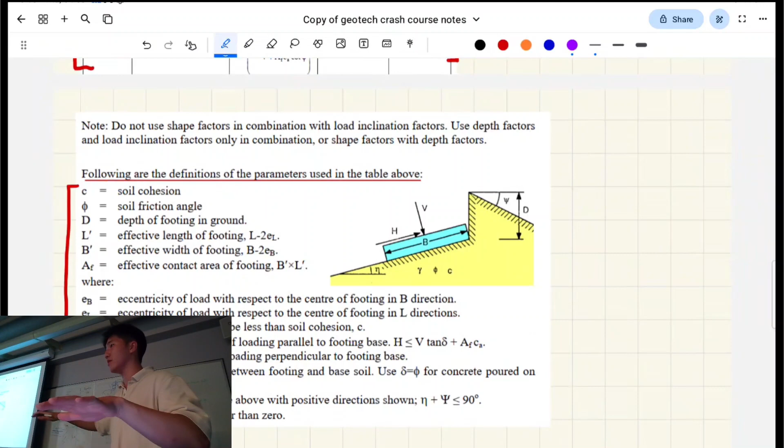Right? Your inclination, ground, and base factors, you can have a read of this later, but it's to do with the angle of how the ground's angled. But for the example, you'll see that everything's flat, so you don't have to worry about these factors at all if the ground's completely flat.

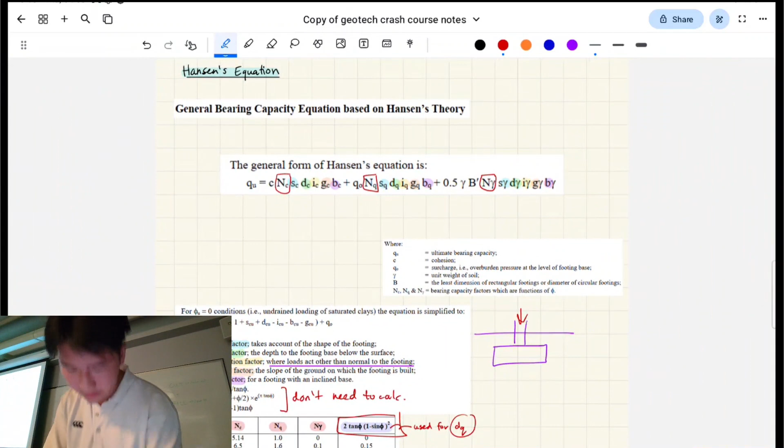And inclination factor I'll quickly talk about. That's if your forces are being applied at an angle, essentially. But if it's being applied bang on, right? All of these will just equal 1. So it's fine. Does anyone have questions? Because this is a very important equation. This is like your Bernoulli equation from back in fluids. You use it all the time, right? Cool.

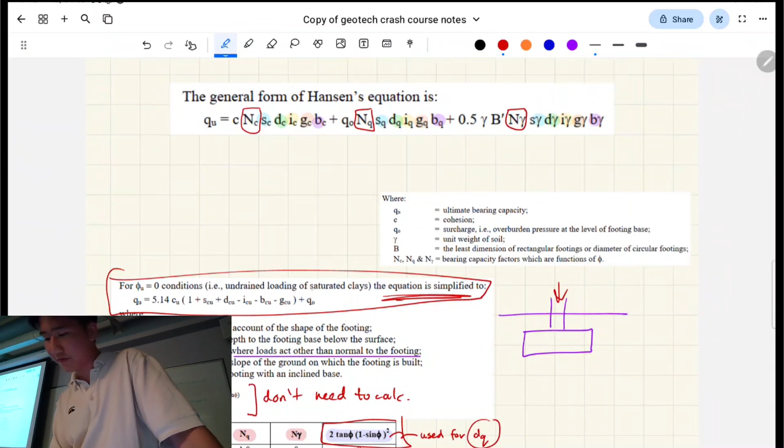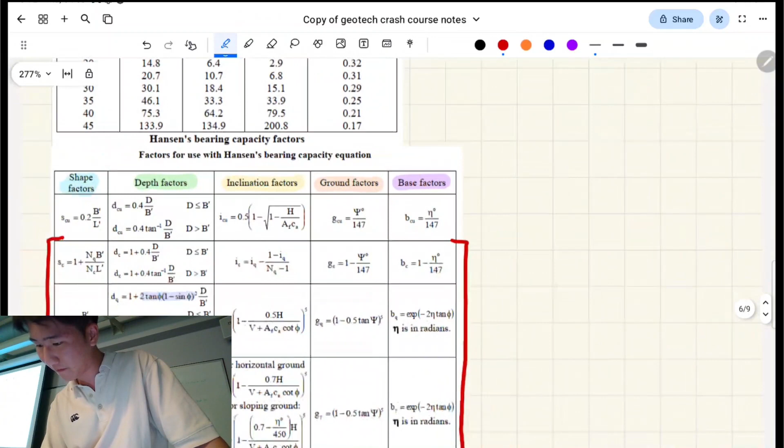Oh, and one more thing. For saturated conditions, so undrained conditions, there's a simplification for this whole formula, and you'll see that it says CU. CU is from this part of the table, right? Whereas the rest of the factors are from the bottom parts of the table. It's just looking up shit. You go back and forth, you do enough practice and you'll get it.

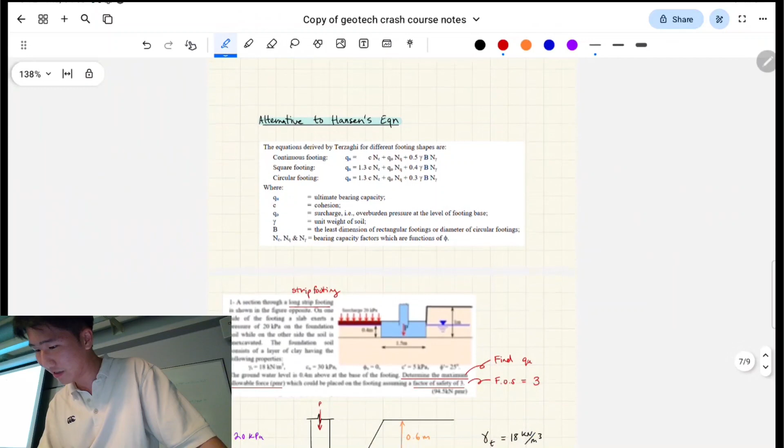So yeah, obviously we're running over time, so we're not gonna have time to do the actual question, but you can look at this later. This is just an alternative. That's called the Terzaghi method or whatever. Oh my days, it was so hard to get this photo. I took a screenshot of the video because I couldn't find the.

Anyway, this is really blurry basically, but it's a strip footing, and therefore your length is way bigger than your breadth, right? Or your width, and it's way bigger than your depth as well. This is just strip footing. And they want you to find QU, which is what we're calculating. This is the soil bearing capacity. And it tells you factor of safety 3. So in the question, they'll tell you factor of safety 3.

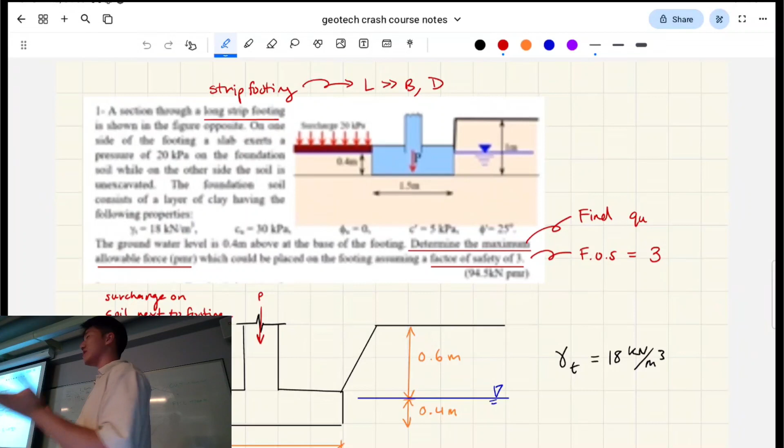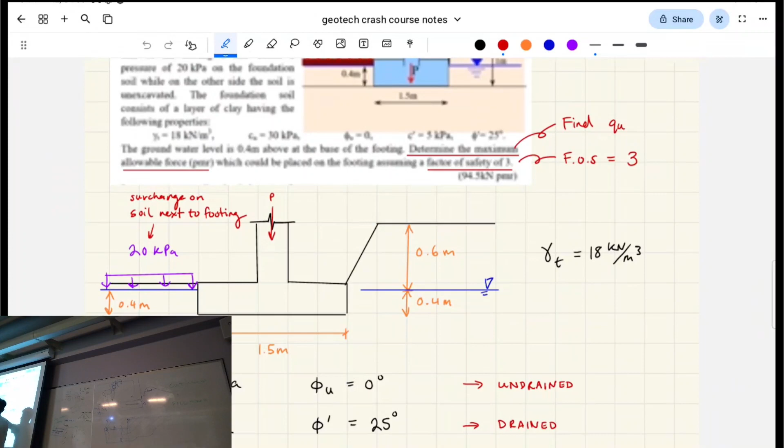It's not that bad. And you have to note that when you're designing a foundation, they give you this elevation, side-on view, and you have to do your calculations for surcharge based on the left and right-hand side. So there's different conditions here. Here you have this external surcharge load. It could be from a building or whatever. And here, there's additional earth levels with a water table and stuff.

And then you do your drained and undrained analysis, so use the different formulas. For your drained analysis, you use the Hansen general equation. Your undrained, use the simplified version, which I forgot. And just plug in. You just look up numbers on where everything is, and then you plug it in. Here I've cancelled out over half of these terms. You don't have to calculate these, right? So you find out what you do have to calculate.

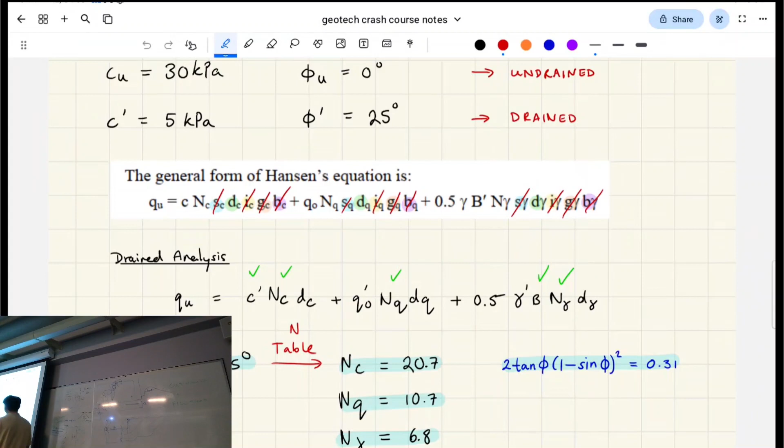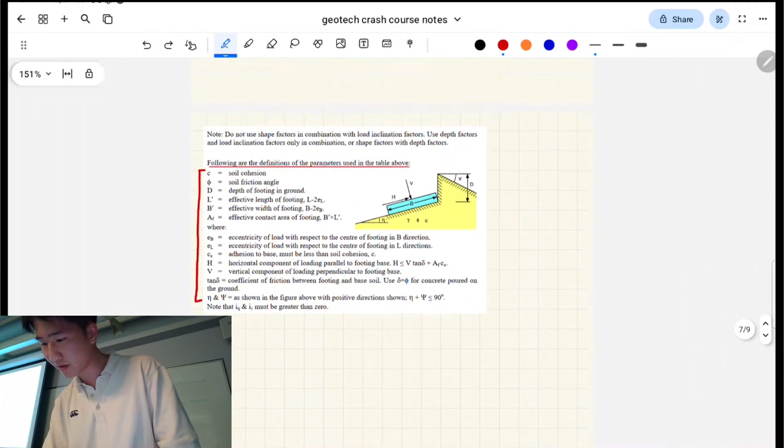Which in this case is D, right? I think you always pretty much have to calculate D. So that's the depth factor. But the rest just turn out to be 1. And this is what Hansen's equation looks like after you scratch out everything. You look at the table, you refer to 25 angle, which is here, sorry. So that's 25. And then all of a sudden you have NC, NQ, and N gamma already. That's not bad. And you note down this factor, because that factor will plug into this equation here.

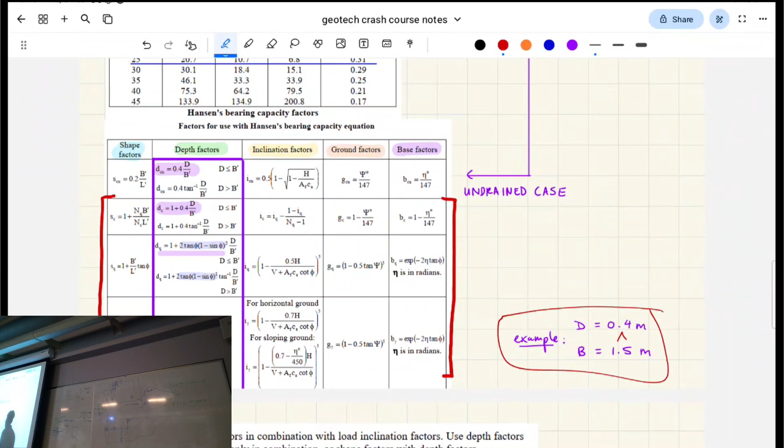For our example, our width is way bigger than our depth. So you use this top one. There's an if this, use this, and if this, use this. Alright. That's the whole question. There's a few more nuances, but surcharges from soil mechanics, you calculate the minimum on both sides using your effective weight and stuff. And here at the very end, we do the factor of safety thing. So your allowable earth pressure is equal to what you calculated divided by factor of safety. That's it. Any questions?